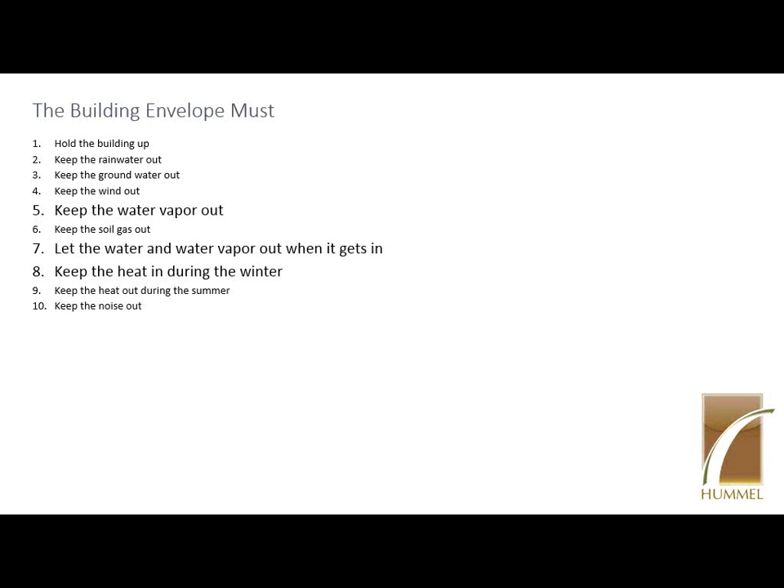So as we ratchet down on our insulation requirements, the low-hanging fruit left is now in a lot of the detail areas. It's not quite as easy as just throwing more insulation into the wall.

IECC 2012 - this was to talk about how the code helps us do things. There's a simple way with the prescriptive approach. We can check if we have a mass wall, then in climate zone 5 we need to provide R11.4 CI, and the continuous insulation definition of CI is that you're not putting studs between that and the wall - it has to be a continuous layer of insulation.

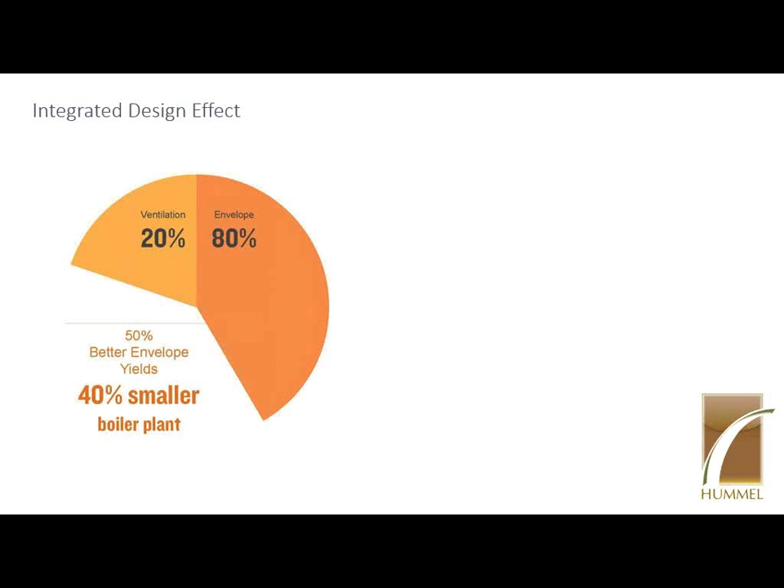The requirements for metal frame buildings allow for some cavity insulation, R13, but also still require at least R7.5 CI. That's usually done with outboard insulated sheathing of some kind, combined with R13 batt insulation.

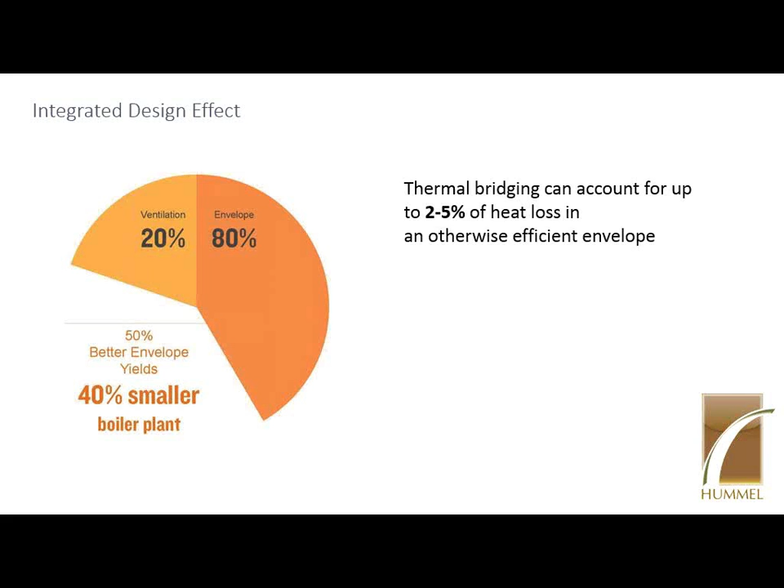Let's keep looking at those two for instance. When you go to the other method, U value, you can use this as a performance way to do it - there's several ways. If you have a uniform wall assembly with continuous insulation, CMU, maybe something else on the inside, you can usually use a spreadsheet to figure that out if it's not already in a table. But if you have different stud layers, it can be more difficult to figure out, and that's when I've used THERM instead of a spreadsheet to calculate the clear wall U value assembly.

One thing to note: that mass wall requirement in the prescriptive used to be R11.4 CI, same as the 2009 code, but it used to be U.09, which was not quite as stringent. I think they figured out that if you're sneaky with the software, you could use less insulation than they intended. So this is more in alignment with modeling results closer to the prescriptive. But typically the prescriptive requirements have more insulation than you'd actually need if you modeled the whole wall to meet performance requirements.

Does that make sense?

Is there a reference somewhere that has those?

I built my own, but if you just look up calculating U value, it's a quick couple pieces of math. Sometimes the hardest part is searching out the material properties. Engineeringtoolbox.com is a good place to look.

And when it gets to some trickier assemblies - unless you're using THERM and you want to know the average U value of a CMU wall that's grouted every 32 inches with medium weight concrete - there's a table for that. The Concrete Masonry Association has studies that list that kind of stuff, so you don't necessarily have to go to THERM. You can sometimes find that information without going to the next level.

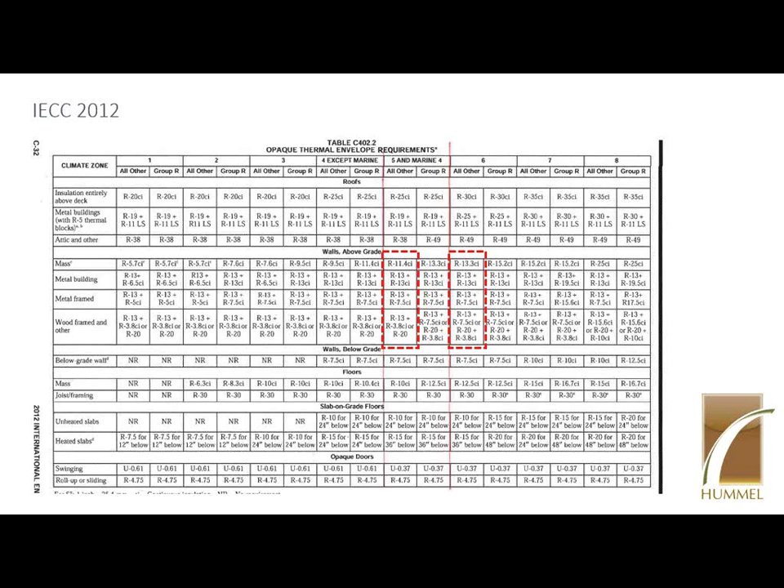So in reference to that, I did circle our typical climates for Idaho, 5 and 6. If we're doing projects in Idaho, those are mostly the climate zones that we're dealing with. So this is to stop to talk about vapor barriers and vapor control in walls as well.

It's kind of interesting, actually. This is out of the IBC, not the IECC, so I have to cross-reference a little bit, but if you look at this table 1405.3.1 and the climate zones, it says when your insulated sheathing R-value is over R5 on a 2x4 or R7.5 on a 2x6 wall, and that's typically what we're going to see, right? So if we have a commercial building with 6-inch metal studs, the prescriptive requirement tells us, hey, metal frame building, you've got to use R7.5.

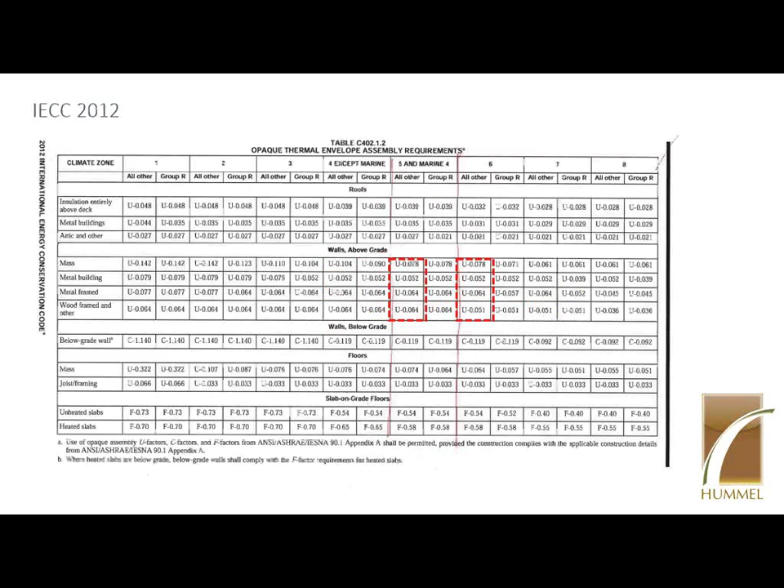If you follow the prescriptive requirements, then it's telling you you can use a class 3 vapor retarder. I handed out some references on the perm ratings, that's basically the definition, so you can keep that as a reference. You can use a level of vapor retarder instead of putting plastic in your wall. When you have a sheet of insulated sheathing there, it's another layer of plastic. People are typically used to putting a layer of 6 mil or 8 mil poly on the inside face, and now you've got 2 layers of plastic. So when you get moisture in there, it can't dry out, can't dry in.

So this is that code allowance to say you can use basically a low perm paint. It's still breathable, but it's not as much of a barrier as plastic on the inside face of the wall. So that's if you have insulated sheathing over these limits and you want to get rid of that plastic and use a class 3 vapor retarder. But you can actually use a class 2 in our climate without exterior sheathing. Yeah. And class 3 is what we use if you have exterior sheathing. Right. Now, see, Scott, he'll correct me. He does more of this than I do.

So just as a note, I've seen a lot of details where it's common to see the plastic on both layers. I think probably, Skylar, you've seen that. People do it because they remember that's what they used to have, and then they add insulated sheathing, and you get a sealed cavity of 2 layers of plastic, which is no good.

So that is just the definition. Class 1 materials are 0.1 perm or less, so that's the plastic. Those are basically vapor impermeable, a vapor barrier. If you say vapor barrier on your plans, that means less than 0.1 perms. Class 2 is up to 1 perm and greater than 0.1, a vapor retarder, so that's the difference between barrier and retarder when you're using that language, or vapor semi-impermeable. Class 3 is from 1 up to 10 perms, and class 4 is anything more than 10 perms.

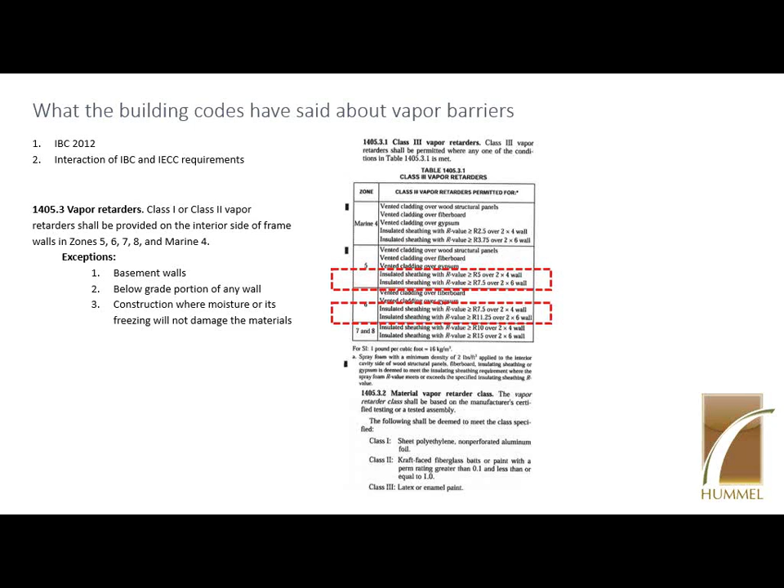And so I have a list of some different materials just to think about that. If you're using polyisocyanurate on the outside face of the building, you can see the dry cup rating, which is the ASTM test listed on the top of that reference sheet, which classifies the materials. That perm rating is really low, way less than 0.1. You can look at XPS rigid insulation. That's still 1 at 1 inch, but if you're going over an inch, then it's going to be less than 1 perm by the dry cup method. So those would basically be classified as vapor barriers.

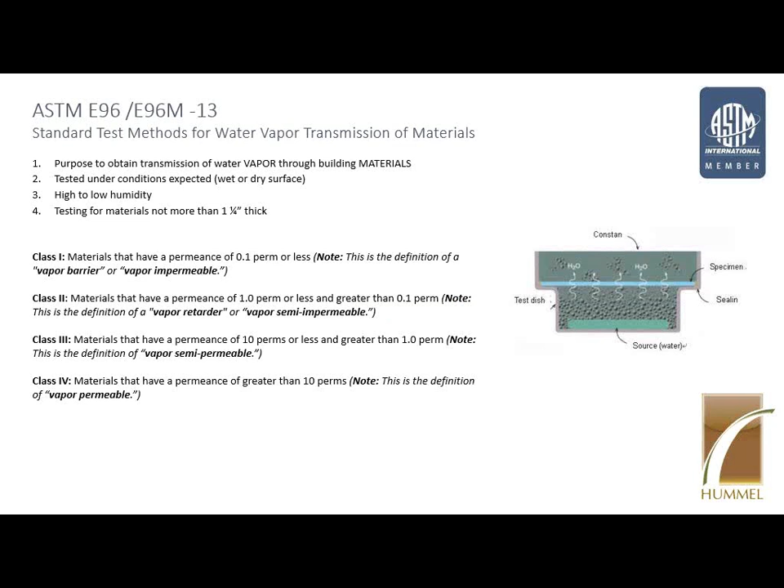And I guess the point that I wanted to make is that when you use those class 1 vapor barriers, we still have tons of different holes that we put in the walls all over the place for switches and electrical outlets and lights and everything else. And so unless all of those are perfectly sealed up to class 1 vapor barrier level, then you will have moisture migration into the wall cavity.

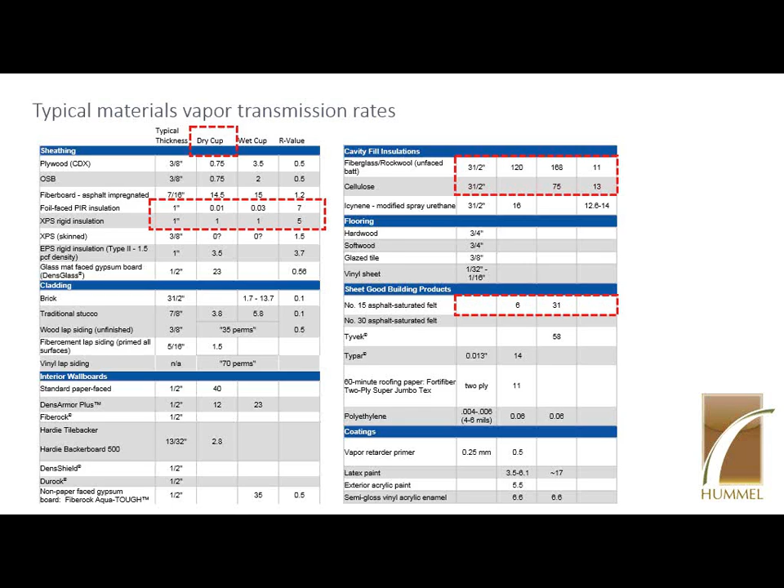And if you have a material that allows it, such as fiberglass batts or some of the cellulose materials, you'll have moisture migration to that cold surface. And so it kind of makes more sense, especially when you start using exterior insulated sheathing, to use a higher class vapor barrier, vapor retarder. It's hard to get them all straight.

This is just a good example from Joe Lstiburek's book about actual diffusion through materials. So he's saying a full sheet of gypsum board with normal interior humidities and temperatures, you can push about 1/3 quart of water through that actual solid material. But if you have a small 1-inch square hole, all the air transported through the hole equals about 30 quarts of water. So air movement in the assembly, those outlets, anything that's letting air flow around in the cavity, is where you'll get a lot of this moisture transport.

And so in solving that problem, one of the things that we're starting to do is getting those higher levels of insulated sheathing on the outside, which creates a warm wall. It's not like this assembly where we just have sheathing on the outside and that condensing surface is really cold. We start having insulation on the outside, then we get a surface that's warmer than the condensing temperature, and we won't have that issue.

I think people probably remember the Dryvit incident that happened in, I think it was the 80s or 90s. There's an impermeable layer of foam that was really thin on the outside of the buildings. Water got to the outside face, it was cold enough to condense, it couldn't dry out to the outside, so there were a lot of rot issues. Without enough foam on the outside, that's what happened. There needs to be the right level of insulation on the outside to make sure that inside surface is warm enough.

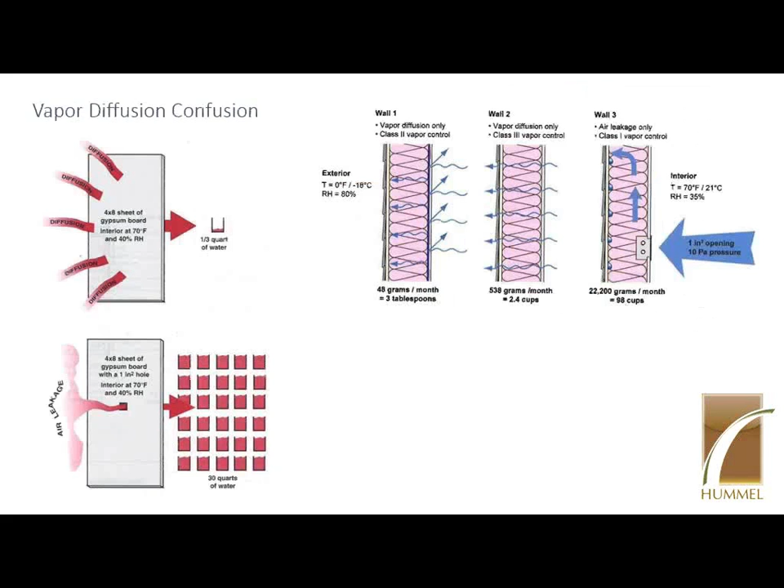And so the thickness of this material is important. If it's too thin, you get that Dryvit issue, especially if it's impermeable and it's not thick enough, you get condensing on that surface. So this needs to be a minimum, and that's basically what the code's trying to do with their minimum values for the CI on the outside. But if you're going to design to the U value, think about the vapor controls. It's important to remember when you're designing wall systems.

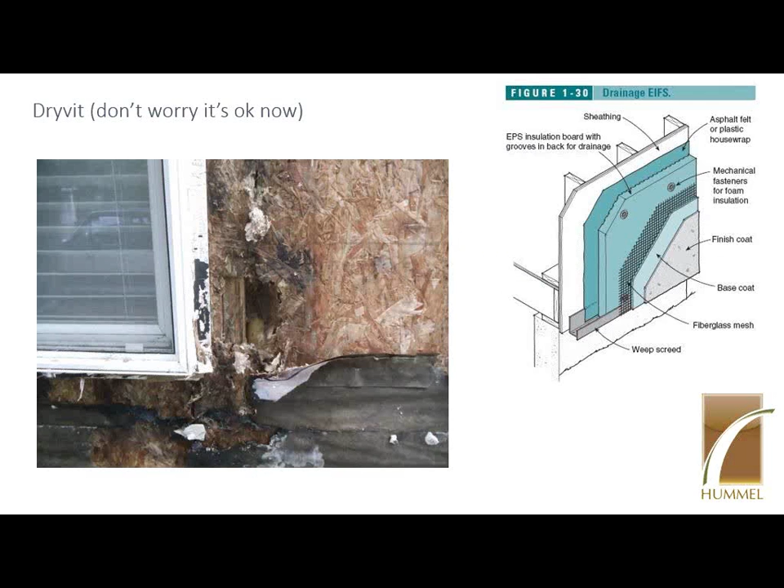Another example, and this one illustrates why, you know, some of those walls you see R13 in a 6-inch cavity. It's like, well, why not put more cavity fiberglass batts in the system?

Well, one of the things that's going to do is it's going to slow down the heat getting to that exterior layer of insulation. So in these two examples, you can see this is an example with, say, just an example, R10 insulation. The outdoor temperature is down towards 0, like the design temperature. And the profile of the temperature in the wall, most of the insulation is right here, so most of the temperature gradient happens right here.

So the inside face of this wall is 60 degrees. No problem. You're not going to get condensation on the inside of that wall. You're only going to be at R10, but no condensation problems because the inside is warming up that surface readily. If you throw R19 in this wall, a lot of the heat resistance is in that cavity. So by the time the heat gets to this face of the wall, there's not much more to go. So now your temperature is pretty far down. That could be a problem.

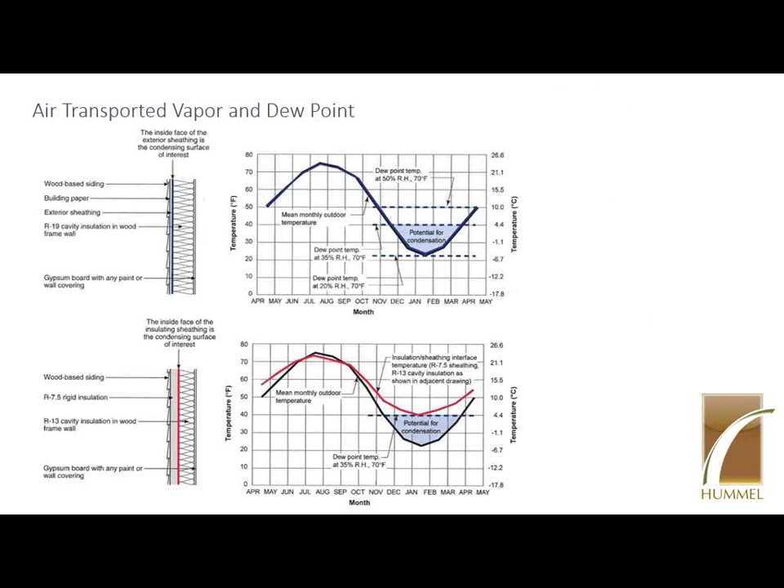But what they're showing here is when you jump back to R12 or R13 batts in this wall, then there's more heat getting to the surface before it lets this thing do a lot of the work. So that's kind of the intent behind listing the R7.5 for climate zone 5 and then R13 rather than jumping it up. So if you're trying to add cavity insulation, one, it doesn't do that much after a certain point. But two, it also does retard heat flow to a surface where you might need a little bit of extra heat. Does that all make sense? I have to read through it every time I'm looking at different materials.

So on to the thermal bridging piece. You don't have to remember anything from today, because there's a lot of stuff you might need in your typical practice. If you just Google the ASHRAE Research Project 1365, they have a ton of different solutions and wall systems, showing the nominal and actual performance values of those different wall systems and their U values. Because there's a big difference between, say, this system where you've got your steel studs and you're using a vertical Z-girt to attach siding on the outside of the insulation, or you're doing horizontals, or maybe intermittent clips. And those all have a pretty significant difference in results.

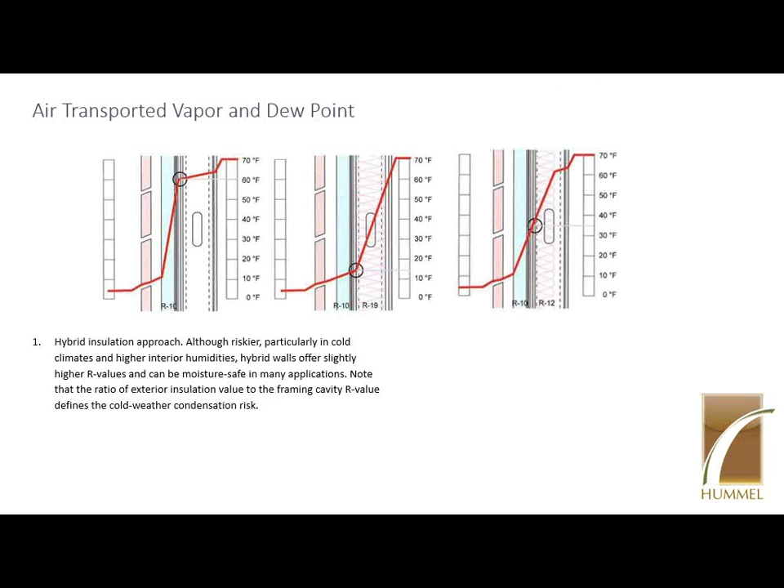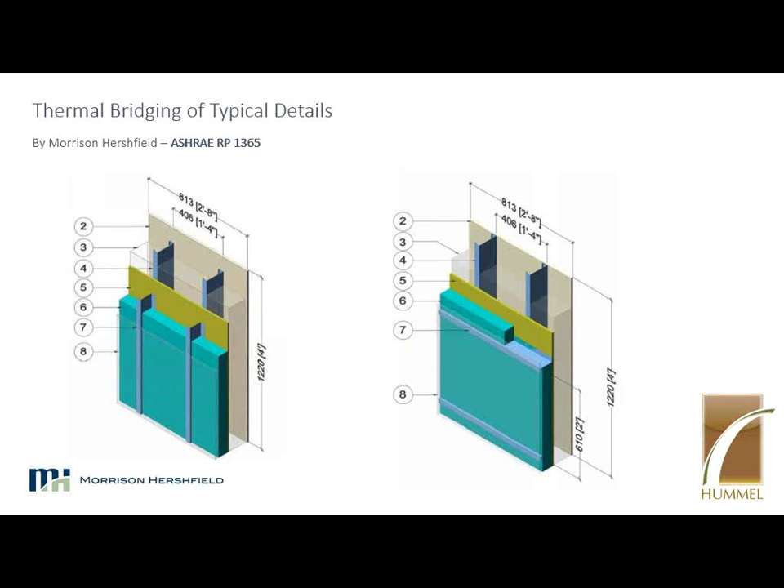So this is some of the information that Morrison Hershfield published in that RP. And what they'll run you through is all the different insulation values for different prescriptive amounts. It's R19 or whatever, but that's not really what it is. So here's an example, and this is just for steel stud walls. I have a whole bunch of other ones. Down on the bottom, you can see the nominal R value, and over here the actual performance R value of the actual wall assembly, clear field.

So a lot of what they use it for is to help with the rating system and classification for windows, the NFRC ratings we need on our windows nowadays. They'll thermally model the frames. That's a little more complex than we need for our architectural piece. But you can also model architectural walls, wall to slab, wall to patio, cantilevers, parapets, clear wall assemblies, if you've got a challenging condition. Maybe it's a retrofit, and you want to do spacers with steel studs off of the masonry wall and put spray foam in it. This can help you see if you're meeting your performance targets.

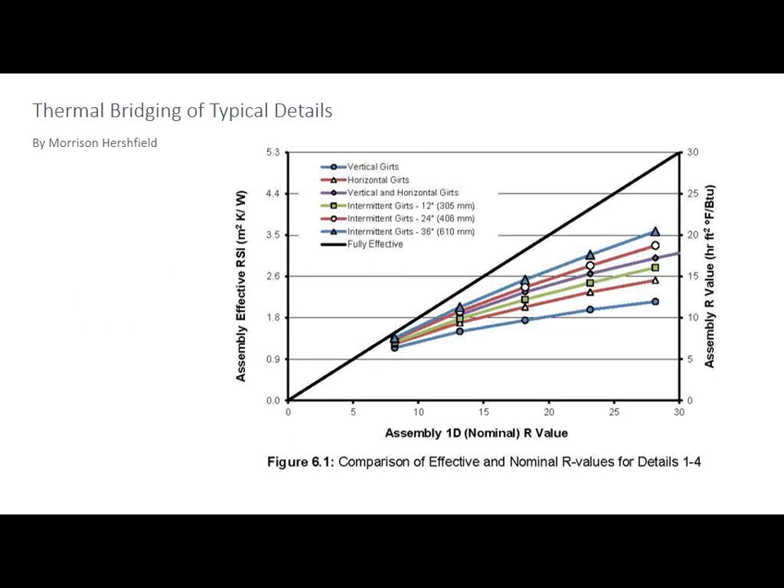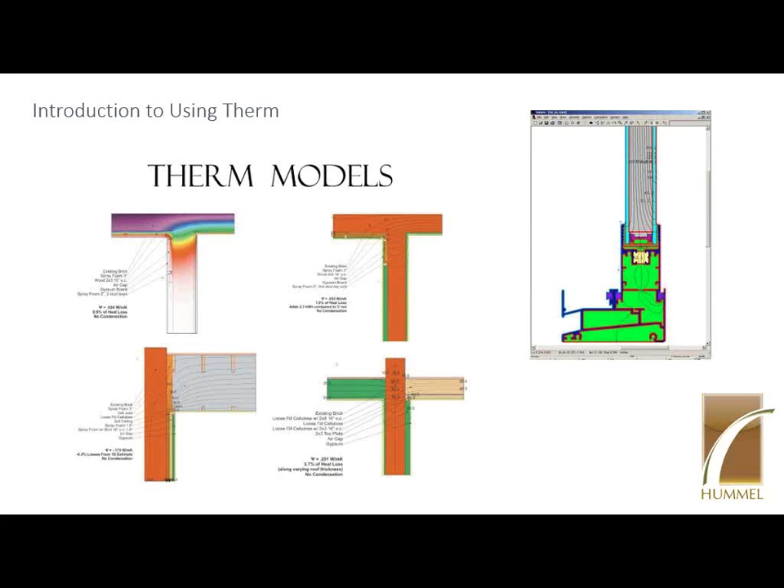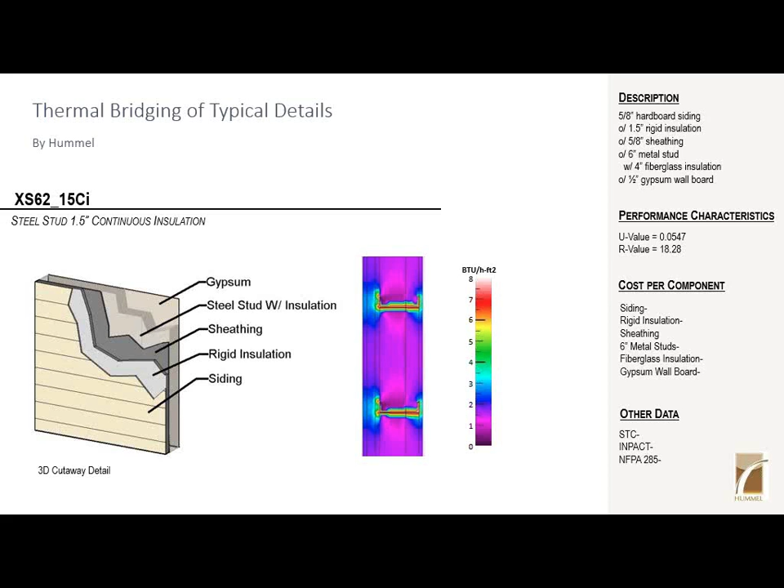So the next thing is basically the clear wall assembly. This is what you get if you're doing your spreadsheet system and just putting in each layer of materials: 5/8 inch sheathing, 6-inch stud cavity with fiberglass batts, gyp wall. You can even add your air boundary layers on the inside and outside, and you just get a continuous linear number that's based on the clear field.

So if you start introducing different studs and different things into the wall, what you really have is something that will perform quite differently, and that's what that Morrison Hershfield study did — it looked at the three-dimensional systems. That's the tough part. They did three-dimensional modeling to get the interaction of vertical and horizontal girts, because in THERM we can only draw sections. So we have a simple stud wall, we can figure that out. When we start adding vertical and horizontal girts, it gets tough, and we can't quite do it from our perspective — we have to go look at one of their research projects and figure it out.

The other concept I wanted to mention — everybody's probably familiar with R value and U value. They're the inverse of each other. One measures the time it takes for BTUs to escape the outside wall. One measures the amount of energy transferred based on time per square foot, area in square feet, and degree Fahrenheit.

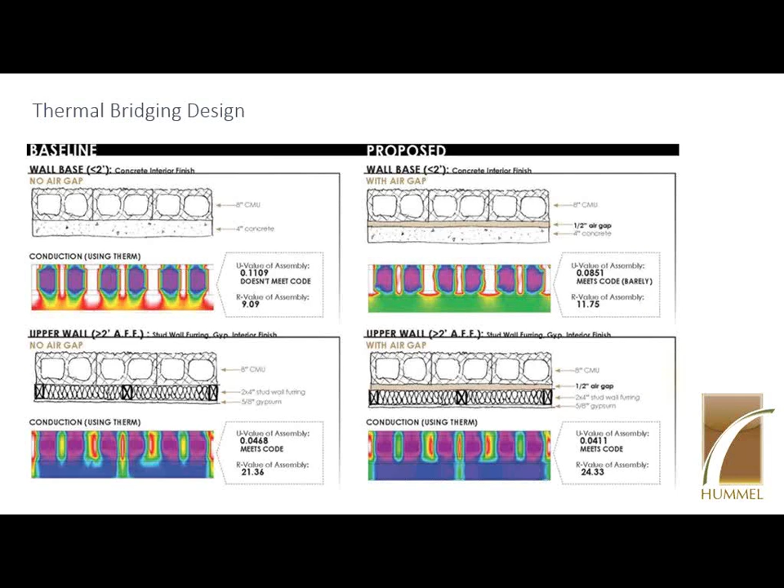One of the other things beyond the clear wall assembly that we have to deal with, which is what we were talking about with thermal bridges, is what's known as the psi value — a linear measurement. This might be where your regular wall assembly meets a slab-on-grade condition, and it's the transfer of energy at that joint. How do we figure that out if we want to try and reduce the amount of energy used?

Katie asked me earlier, have you done that before on a project? And I said yes — we didn't have to submit anything, but we wanted to be close to what they were asking. They asked for 10% more envelope performance than code value, and they had no budget, of course.

So I was trying to figure out ways we could get more performance from the envelope by debridging the slab and wall. After looking at it, I figured it was about 2% of building heat loss at this joint, which ran all the way around the building for the entire perimeter. We couldn't get full breakage everywhere — we had slabs going across doorways and things like that where it was a constructability, quality, and durability issue, so we just kept those as is. But for a big portion of it, where we had regular walls, we were able to bring rigid insulation past the joint, and that helped us get to that 10% over code minimum wall performance, insulation performance.

So that is called the psi value, and it's just, instead of being square feet, it's linear feet. I'll show you how to, basically I'm going to try and show you what you do in THERM to do that.

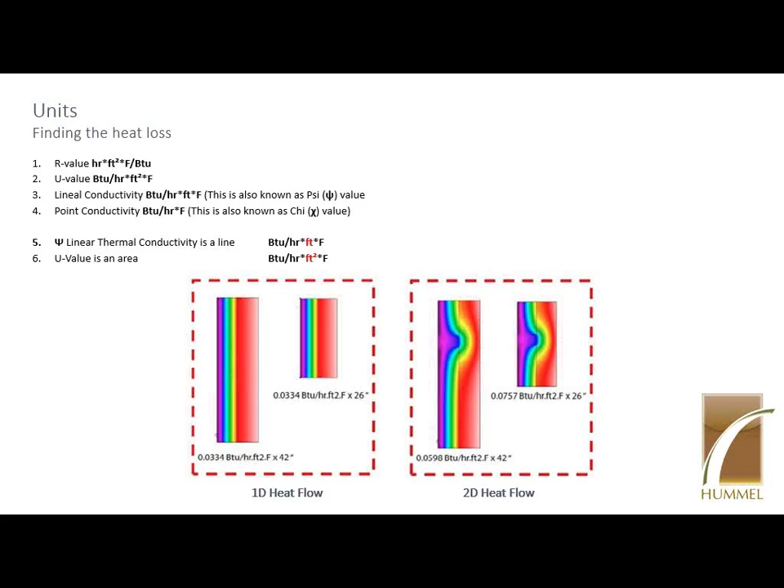But if your line is before one of your condensing surfaces, then you might have a problem. That means the surface on the other side, which would be that sheathing layer, might be colder than what you would get. But it fluctuates over time.

Stuff might get a little bit wet, but if it's not sitting at that for like 3 months, then you probably don't have to worry too much about it. But that's what that WUFI software is for. You can just kind of identify little bits of problems here in this THERM software.

So the way that you do this is basically the performance of the detail versus the performance of the same spans of the clear wall assembly, and you subtract the difference to get the total heat flow through that detail component. You look at the 2-dimensional heat flow model.

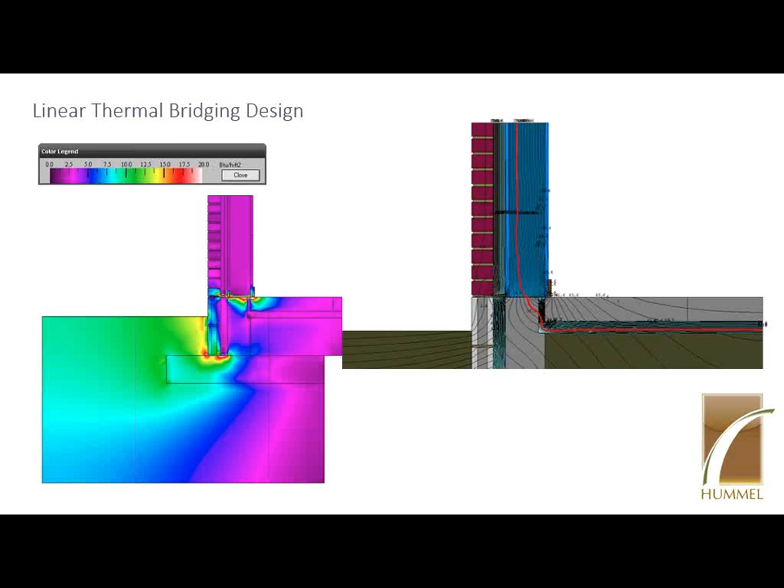And this was a recommendation from Passive House Academy to use 3 times the width of the material. So if 10 inches inside to outside face, they use 30 inches up. And then whatever this assembly, say this is 12 and 36 inches, you would go from the inside up, out, and the floor to 30 inches up on that one.

So if you're just dealing with a corner wall assembly, you don't have to deal with anything else, just the 2 components coming together. But if you're doing a slab, there's another, I'll have on the next slide, recommendations for how to model the ground interface.

Just note that wherever this condition occurs, it's measured as a linear distance. Once you arrive at the psi value, you'll have a thermal transmittance number, and you can get how many BTUs by multiplying across the distance, using linear footage for that versus the U value, which we normally use for a whole wall clear assembly.

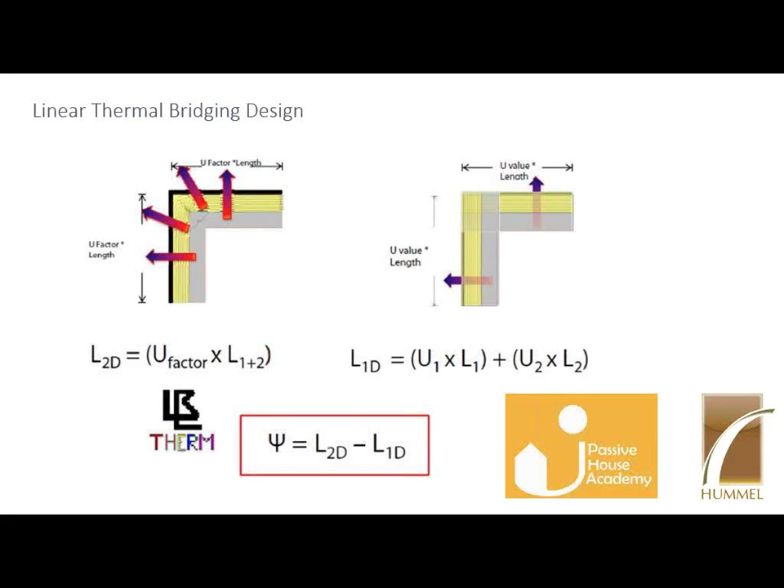For a ground detail, you model some of the earth outside the building. I think this was also from Passive House Academy: 1 meter from the outside face in, 2.5 meters out.

That's an outside air temperature condition, which I'll show you boundary layers for when we walk through the therm stuff. This is an indoor boundary layer. For the ground boundary, you do the average of the two temperatures, and that runs all the way out to the edge. This ground boundary condition is just adiabatic, so there's no heat transfer happening there.

I just wanted to wrap that up, because that's the method to get to this portion of the equation, if you're going to really get detailed in figuring out how much energy is going to transfer through your wall. It's just the sum of the psi value times the total length.

Then there's the chi value, which is the point transmission. So if you have a tube sticking out of a building anywhere and you have 20 of them, the total is 20 times however many BTUs you're getting flowing through the tube at any given time. That'll give you your total wall U value assembly if you add in all of the linear and point transmission.

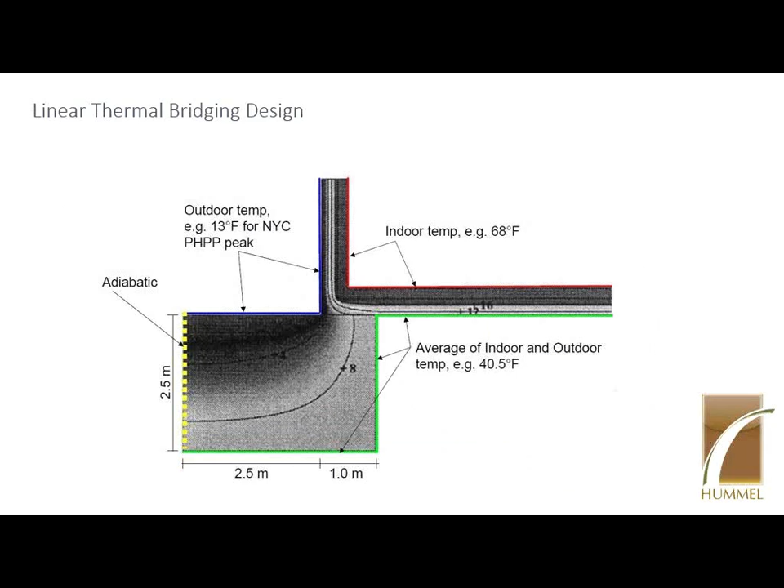Having read some of the stuff from BC Hydro, I think in British Columbia there are some more specific requirements about thermal bridging, which is why the electric utility sponsored the design guides that Morrison Hershfield has on their website—they're really good. There are guys over there that do this all day, every day; I do it maybe once every two months. The guide they produce explains everything I just stumbled through in much greater detail, with all the methods and calculation methods required to do a whole building assembly analysis. If you're doing a high-rise, this might be worthwhile.

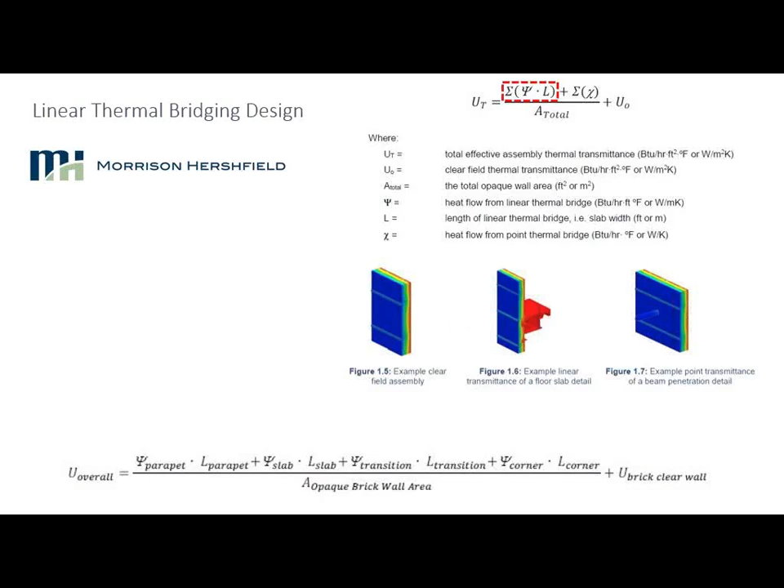If you're doing one building that's wood stud, it's not going to be as big of a deal. In Europe, they basically assign default values and have a library you can choose from. You choose what your details most closely resemble, and you have to use the default values for all of those connections, and then you prove that you're embedded in that.

So it's like even in the UK and in Germany, Austria, they kind of have that. And we don't have anything like that yet. Maybe we'll get there in some period of time.

So that was about 45 minutes, and I was hoping to just show people the interface, since they probably haven't seen it before. So again, it's the material. Take a look at some of that Morrison Hershfield stuff. It's great for commercial building information.

Passive House Academy is good for residential building information. Your local building science resource is useful too. I listed a couple: BC Hydro is where that thermal design guide stuff was generated, by Morrison Hershfield. They also did that ASHRAE RP 1365.

And windows.lbl.gov software is where you can download THERM for free. So what I'd like to do is open THERM and just show a little bit about it. Are there any questions?

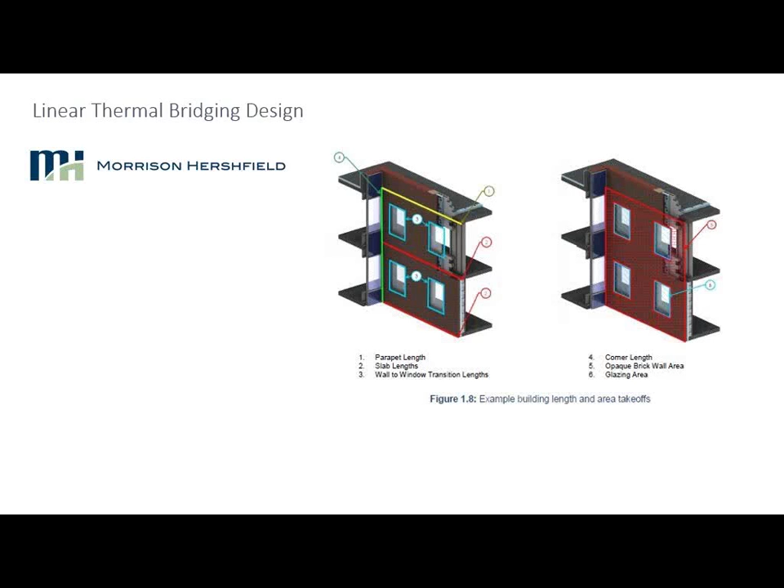So I just loaded in, this is a basic standard wall system: grouted CMU, 32-inch centers, steel stud interior with a pretty common old school wall.

Basically, when I'm trying to do these, if I'm trying to figure out a clear field assembly, I try to give enough space across it to include a few of those grouted cells, to make sure I'm getting enough of that area to understand the actual performance, instead of modeling 1 or 2 blocks. I want to get a few of the blocks with a few of the cells and enough of the studs in the wall system to see what it's going to perform like.

So in here, it's really the basics of the program: you're just drawing polygons and rectangles. It's really fussy about getting corners and edges right. So get out of here—see, fussy.

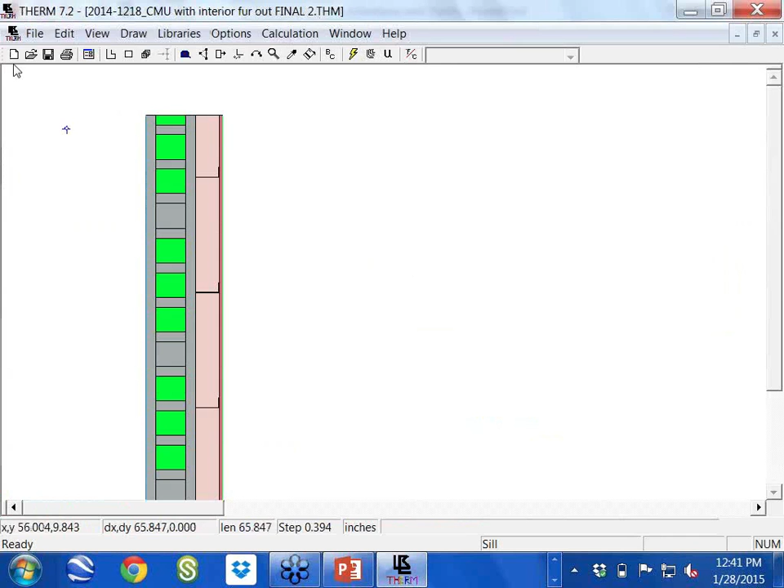Sorry, these are always great when you do live demos. But so I can type in distance, and usually if I'm trying to draw little tiny steel studs, it sucks, but I've found that trying to draw them—and you can import drawings too.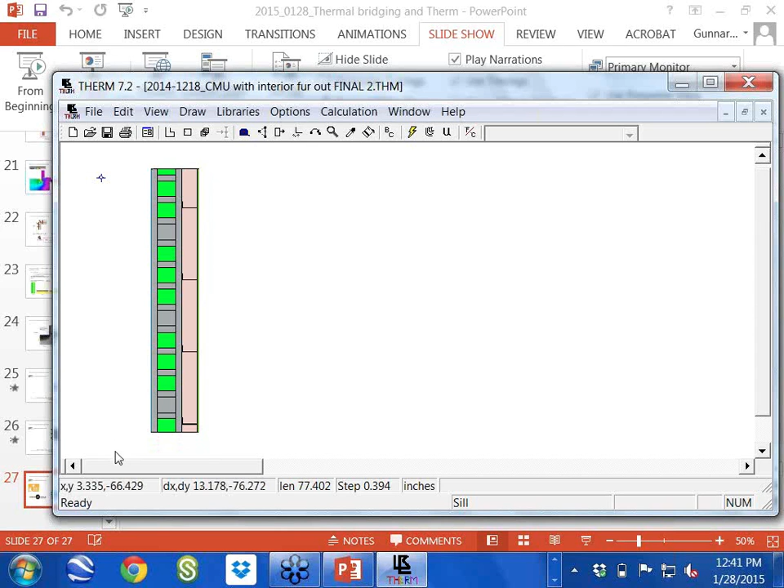I find that if you set the grid to maybe an eighth of an inch, and make sure your underlay is aligned with that grid, then everything will snap to some alignment of an eighth. That's probably the problem I've been having, is that I haven't snapped the drawing to the grid. Yeah, to do that, you have to—see? It's not that hard.

So to those—see, they know better. They know better than I do. I just learned something there.

If you draw, you can import a drawing. You can trace over it, line it up to your grid, and basically draw your assembly. And what you can do is calculate.

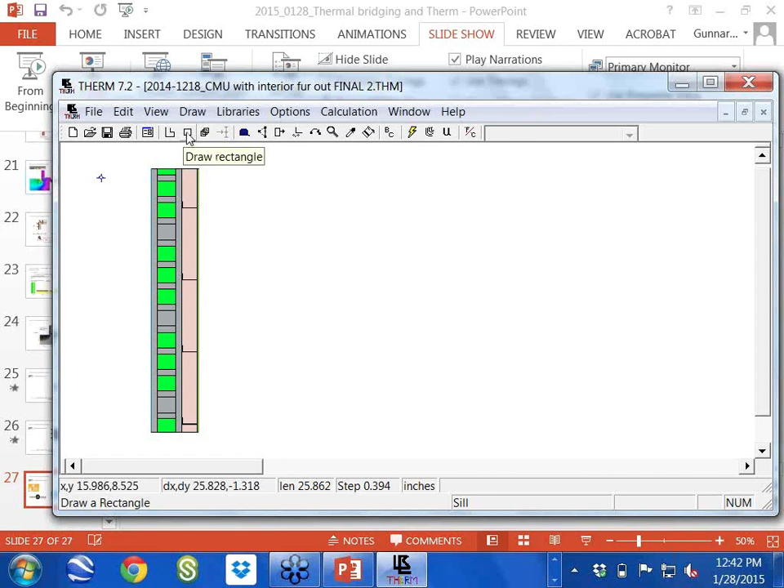I just want to show you some of the outputs really quick, since not many people have seen this before. Yeah, I said it's really fussy. If you have little overlaps, it'll tell you, sorry, figure out what's wrong. And it can be a little frustrating, but if you use the snaps and trace the drawings, it's usually a little bit better. Just some time invested in the beginning is good.

But one of the other things that I probably ought to show real quick.

So basically what you do is draw with rectangles, and then we'll do kind of objects that you can click on and then find a material.

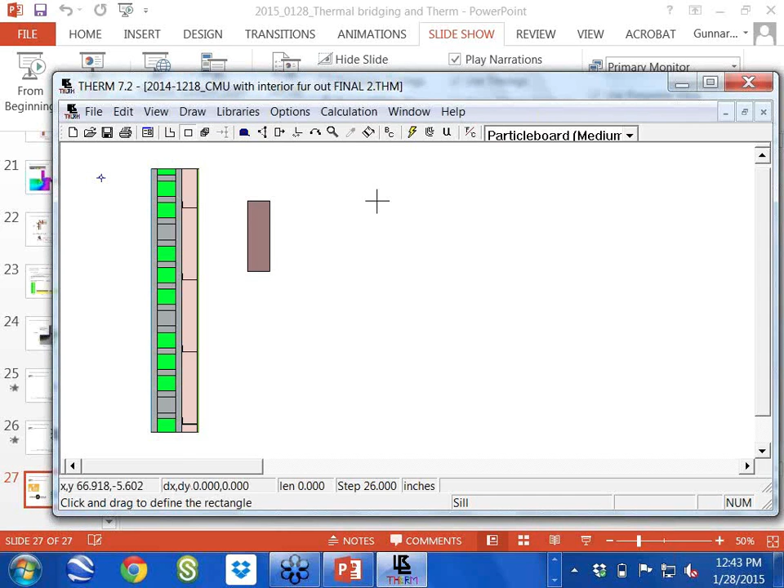I've got the architectural library loaded up. So I just clicked on this piece of CMU block, and you can see how I kind of split them up. It's not totally exactly like a CMU block would look, but it's got the close amount of area. Then I loaded the architectural library, and we can change this to any number of materials that have preloaded values. If you have a specific product with a different type of value, you can modify this pretty easily.

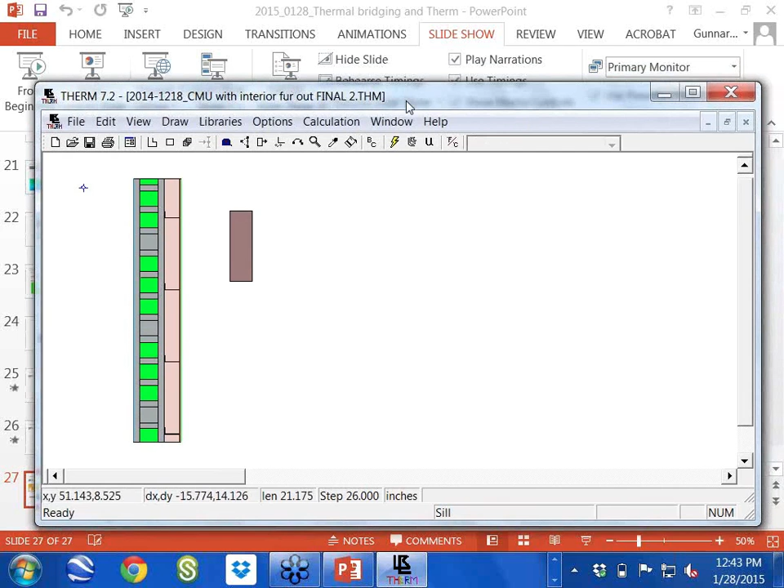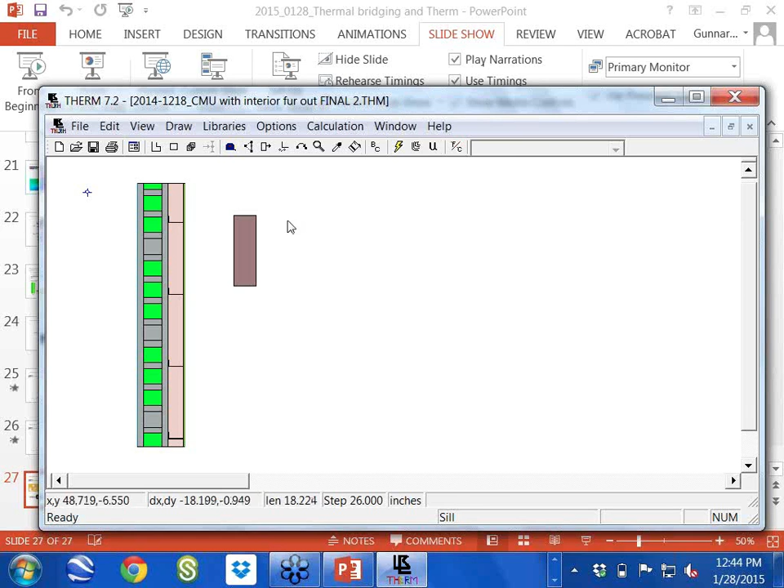If you get materials figured out and save them in your library, it starts getting easier. There's a good selection of items, if you're just starting off, most everything typical you'll need will be in here. You've got different weight concretes, steel, wood, different foam insulations, fiberglass, particle board, gypboard - pretty much everything you need.

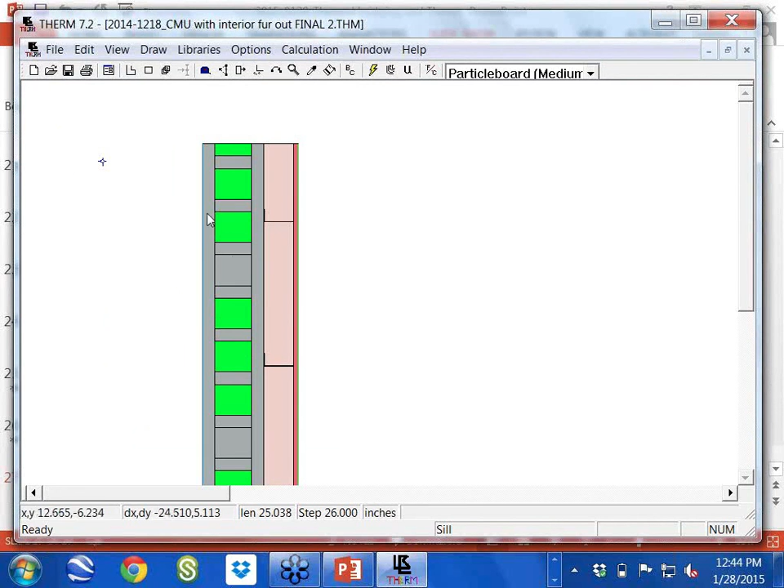So basically what we'd have to do is recalculate now that I have the, I don't know what I put on there, rock wool, something like that.

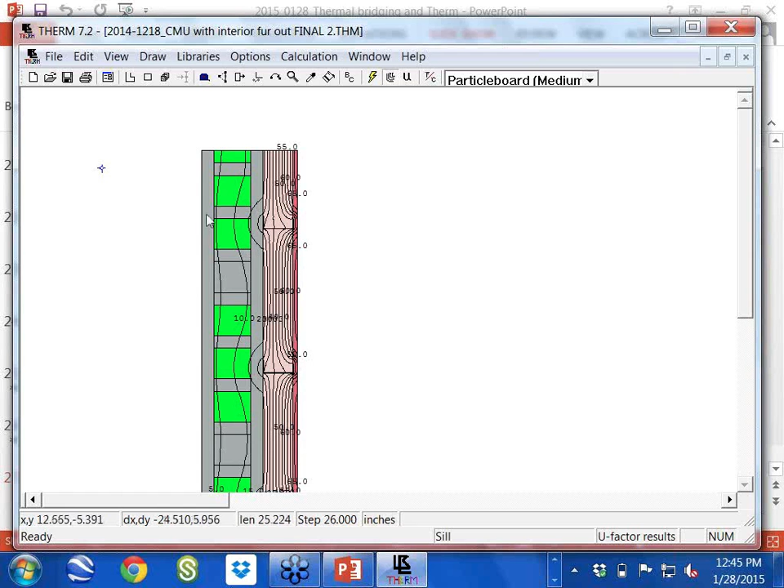This is one of the outputs you can see, which is basically giving you lines of temperature difference. If our interior condition is a typical 68 degrees, and the exterior degree is set to - I think I actually put in the design temperature for Pocatello or whatnot.

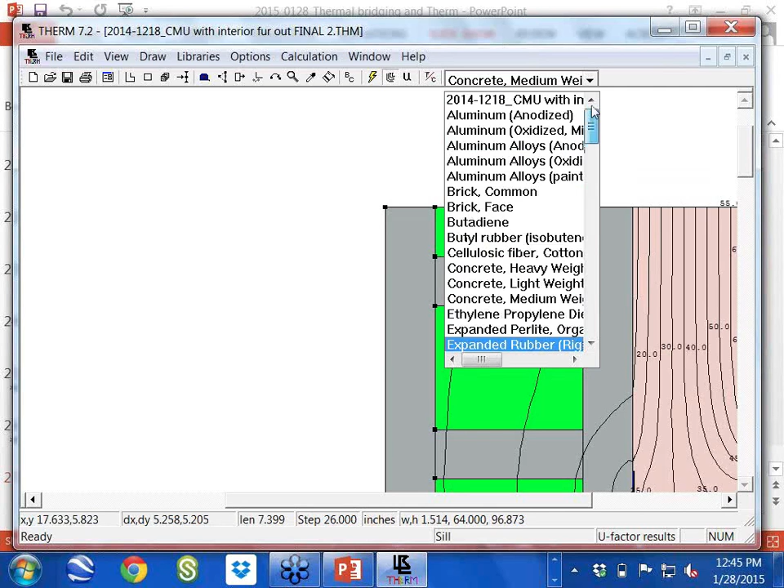The other thing you can pull up really quick is basically what you would need to get that performance value for the code. You probably want to switch the units though, because that's for-

Oh, sure. Yeah, Skylar was just mentioning to switch the units because, again, we have the foot thick unit here.

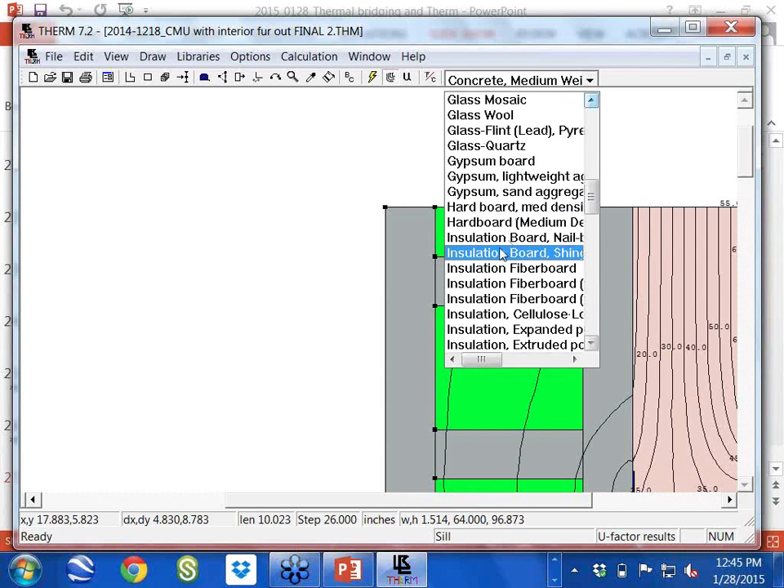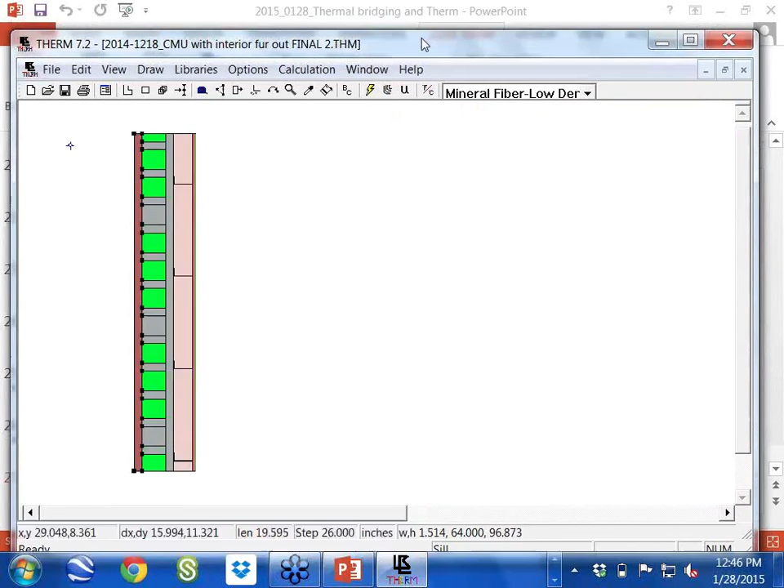Let's see, there's a few other things that you can look at. Flux vector shows you kind of where all of your transmission is happening, and that's obvious - it's at the steel studs in this one. Transfer is happening.

I think it took a little while, like a day or two, to actually import the drawing and be able to draw a wall system. If you have a detail you want to test, you've got it drawn obviously, and then getting it in here and learning is probably a day or two. That's around it at that time - I couldn't get it faster.

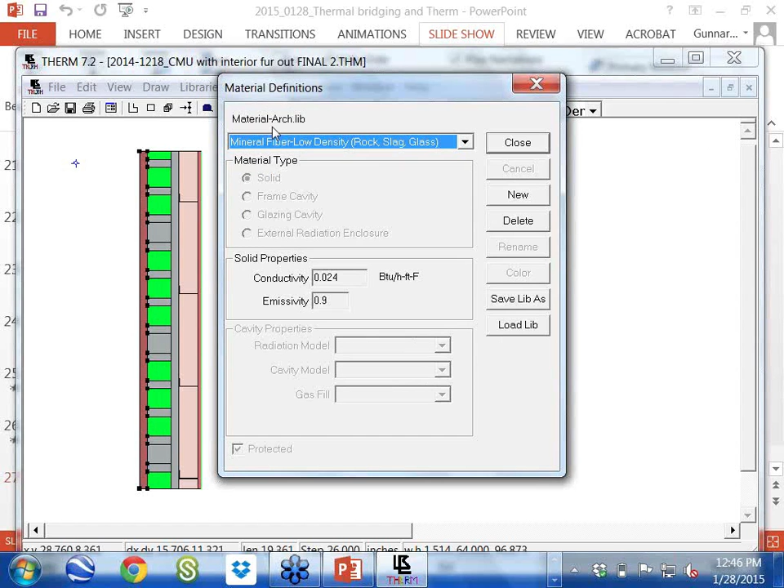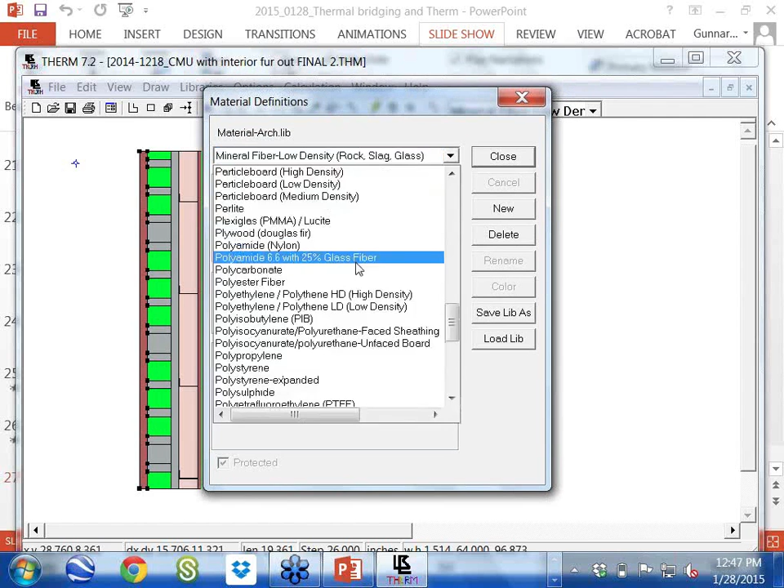Another thing is when you get into multiple temperature boundaries, like if you're trying to do a ground connection and you have an intermediate boundary in between that's semi-conditioned. If you have multiple interfaces, like a leftover non-conditioned basement and partly conditioned crawl space, and then a slab detail, and part of it's slab edge below grade at a certain depth, and part of it's above grade - it can get really difficult to manage all of that.

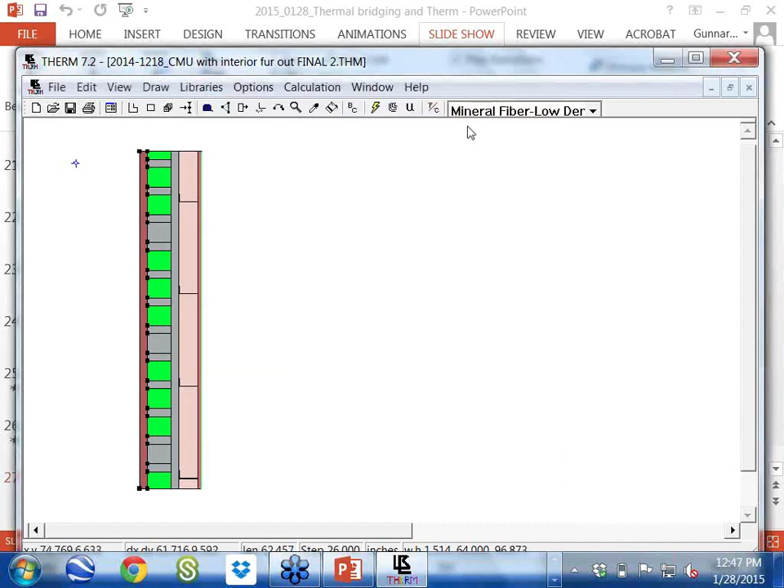As far as practice goes, the way I've used this so far is retrofits, figuring out what I can do to get enough insulation to work with what furring - that's what I've used it for, in 3 different jobs. One new construction where I looked at the psi value around the whole perimeter of the first floor - that's so far what I've used it for in a practice sense.

I haven't done whole buildings like passive house requires, but just here and there when needed - figuring out wall system U-values through a spreadsheet method if you just have a different stack of materials and it's consistent.

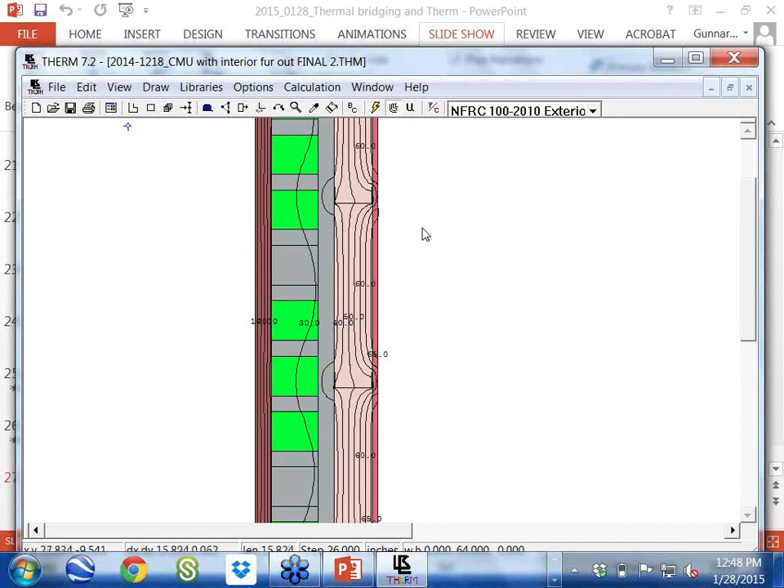But that's all I had. I have a couple things I'd be happy to play around with a little bit more with anybody that wants to afterwards.

I have a couple things from online - they would like a summary of the suggestions that the audience member gave for how to import the geometry, and then any good pointers on getting DXF files to be imported, AutoCAD release, use of polygons versus lines, etc. would be helpful. So yeah, basically, drawing the geometry.

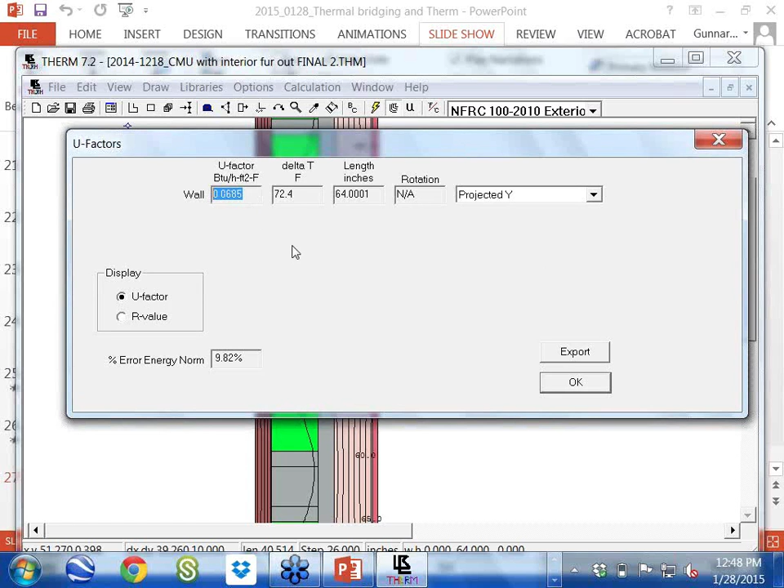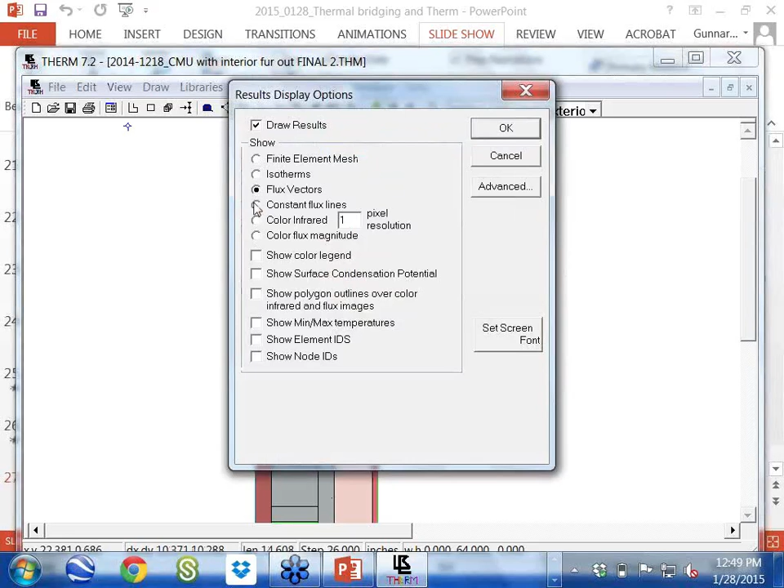Yeah, I think if you export the objects from AutoCAD as closed polygons or polylines, then when you import it, if you go up to File, right there, and you do Import... Oh, let me drag this Underlay down a little bit here. Sorry. Go File, Underlay, and then you can select Auto Convert there on the left when you import your DXF file.

Then it should underlay. And if the polylines are done properly, if they're all closed polylines, polygons at that point, then it will convert them into shapes, and then you just assign the material conductivities to each shape. You don't have to really draw anything. Otherwise, you can underlay the DXF file, and then you just trace it, like Gunnar was saying.

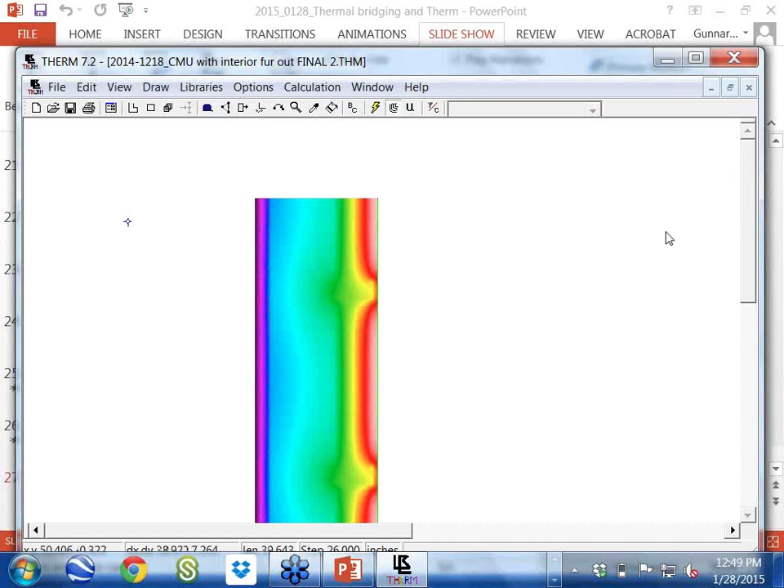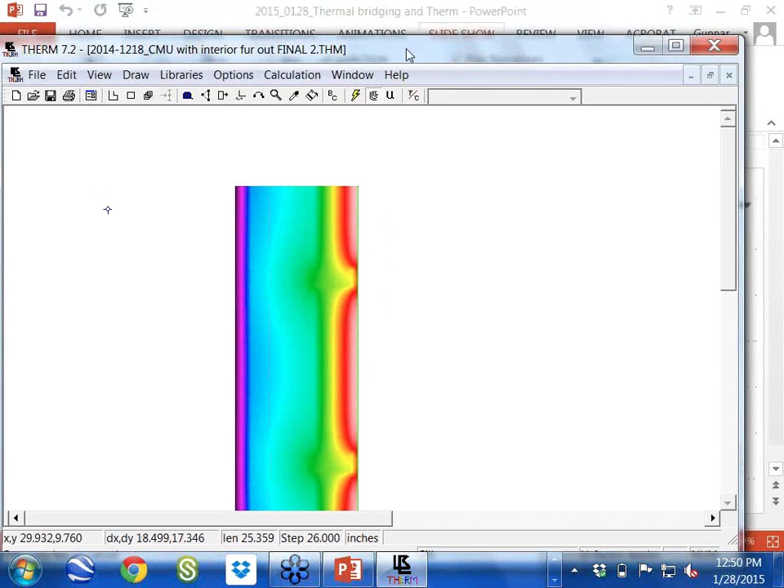Yeah, tracing's pretty tough, and when you draw, everything has to be closed polyline, because otherwise it'll have errors, and sometimes if they're tiny little things that you're drawing, they'll be really hard to find. So another good drawing method is if you have a complex shape, you make shapes around it, and then you fill it with the paint bucket. Yeah, I can show that real quick too.

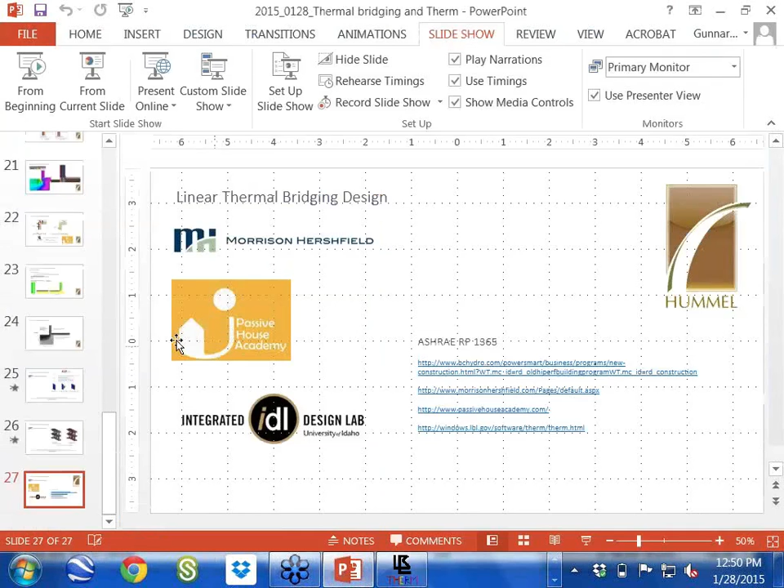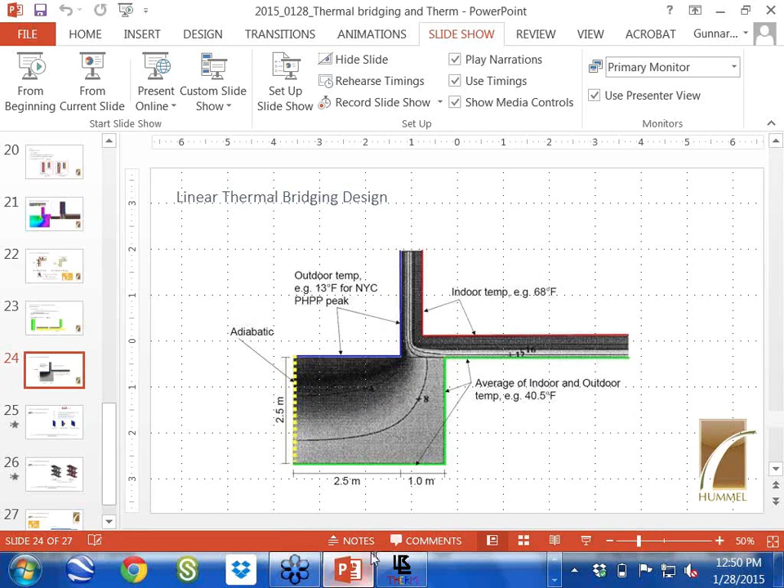Turn that off. So, for instance, this is actually one of those. What I did before to fill it, I just drew something here, and then I can paint bucket that. And if you hit the eyedropper button, you can copy the material and paste it in multiple locations, so you don't have to keep selecting it from a menu. So that's helpful too. Yeah, so I can change my CMU back to CMU.

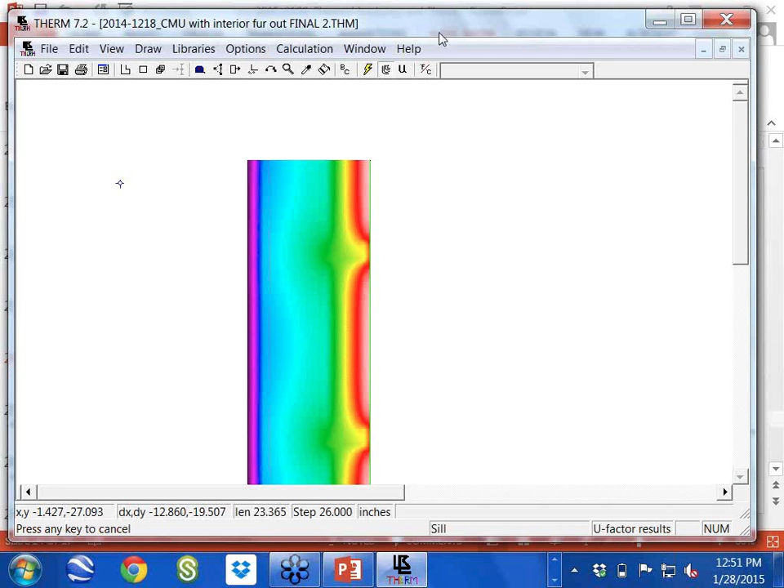And if you're going to be drawing a bunch of polylines, see the button to the right of the rectangle button that has the multiple boxes? Oh yeah, there we go. Then it repeats your tool and you don't have to continue to go up to the menu and reselect it. So that's a really helpful trick as well. Yeah, rectangle, polyline, so you can draw complex shapes, measuring tool. It's important to check your scale if you do the underlay.

Boundary conditions, so you have to identify where the outside air is, basically. Is this outside temperature? And you've got to identify the inside temperature layer. And then, like Skylar was saying, if you have multiple boundary conditions, then it gets kind of tough. You have different temperatures in different areas, all those kinds of things. Sure. So it'll find boundary conditions too.

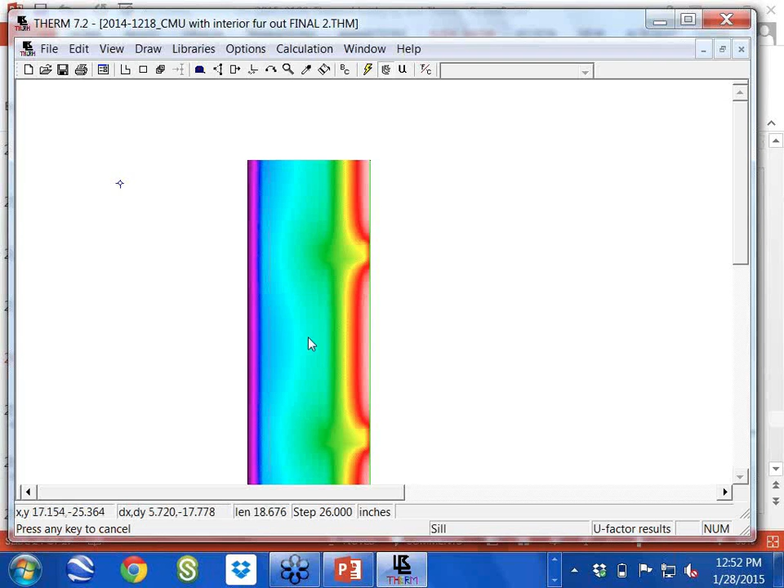So this is what I usually do because my walls are really simple. Skylar, if you have a drawing method too, but usually that's what I've done, and then I just use that BC, and then I select what I can find. So these are all adiabatic because it's just continued more wall on that end going forever, and same thing on the other side. And then this one is changed to an outside boundary layer, and this one is an interior boundary layer. So usually once you get your drawing done, if everything works, you can use this BC.

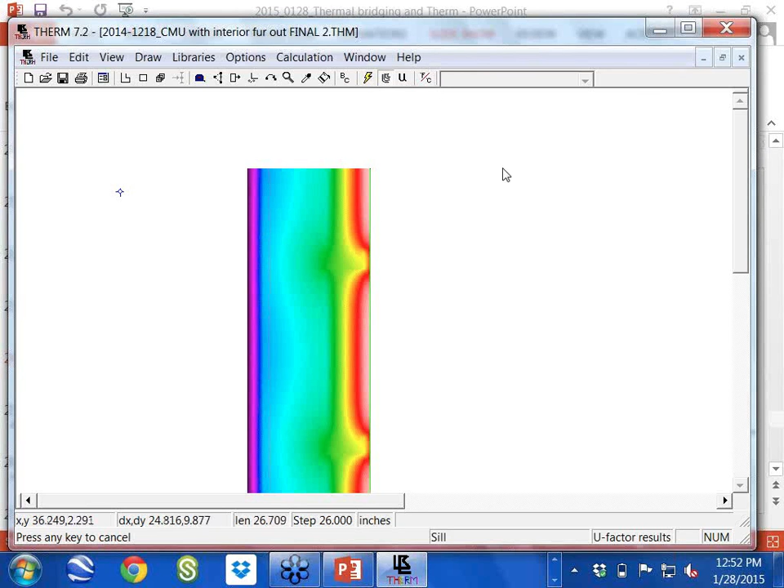That's where a lot of times you'll find out something isn't closed or something overlaps. It'll tell you that you have errors. If I have errors, I usually try not to go through wholesale but just take one thing off at a time and save as until I find it. That's the key. It doesn't have auto-save.

So I've drawn shapes like this before, and then you go to calc it, and it freezes during the calculation, and you lose all of your work. So before you hit boundary condition or calc, it's critical to save every time. Because if there's overlapping geometry, it can freeze, and then you lose everything.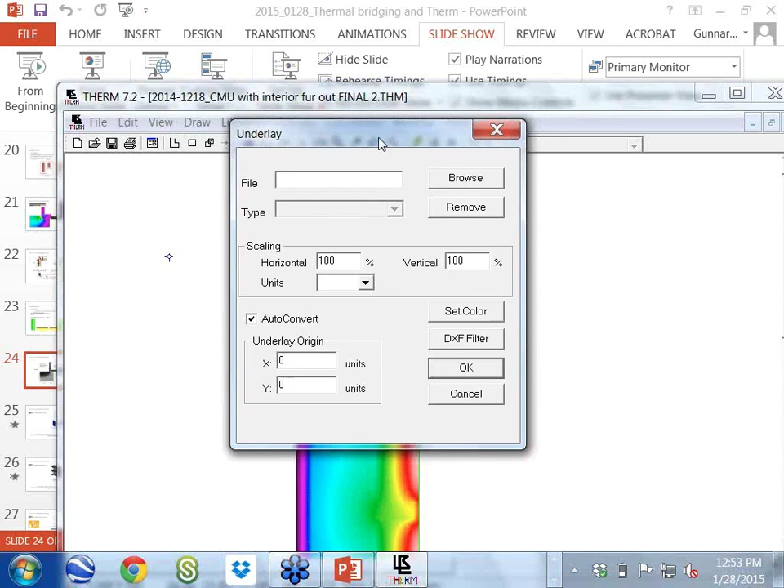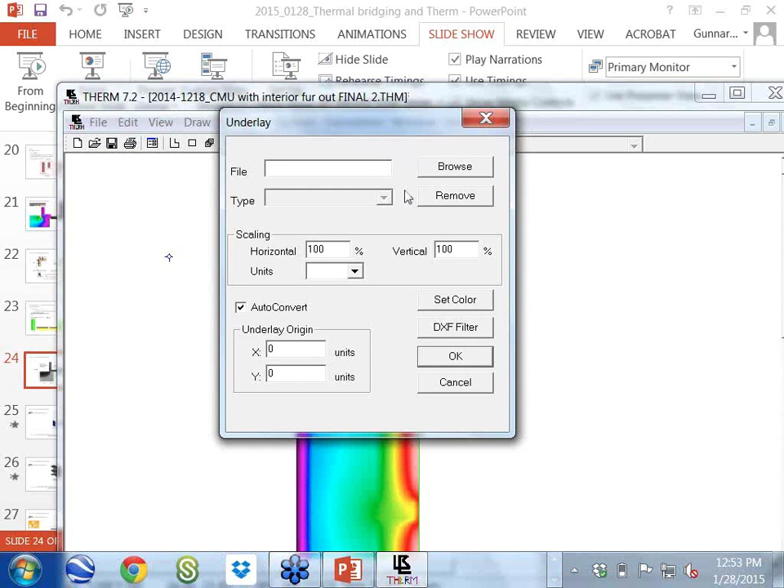Okay, I'll try. The first one is, are the numerical solutions verified versus field data by the developers, by Lawrence Berkeley Lab? Yeah, I think the development of the tool is based on hotbox tests, maybe with Oak Ridge. I'm not sure though. THERM's been around for, good God, I don't know, 20 years, 30 years.

Okay. Another question. But it is the standard for NFRC ratings to do window modeling using WINDOW 6 or 7 or whatever it is now. So the national rating system for fenestration uses THERM to do the modeling too.